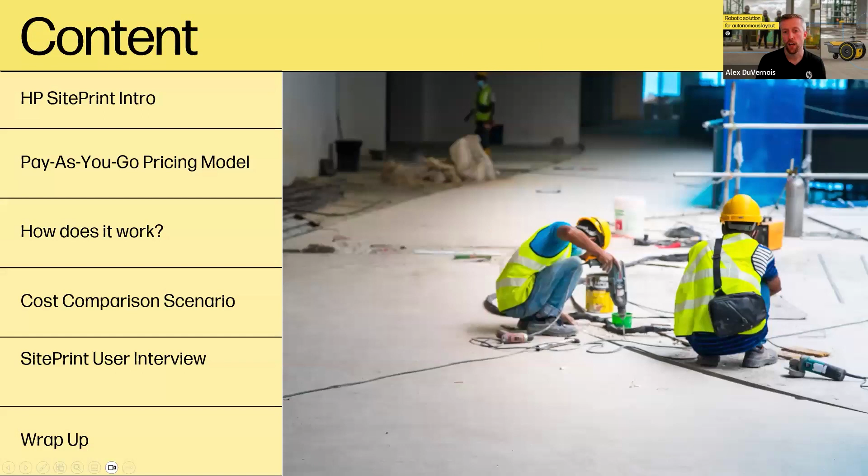So today during the call we're going to go over a few things. First, a brief intro into the HP SitePrint. Then we'll go over the pay-as-you-go pricing model, how it works, and a brief cost comparison scenario, before wrapping up with a SitePrint user interview and tying all the slides together as we finish up.

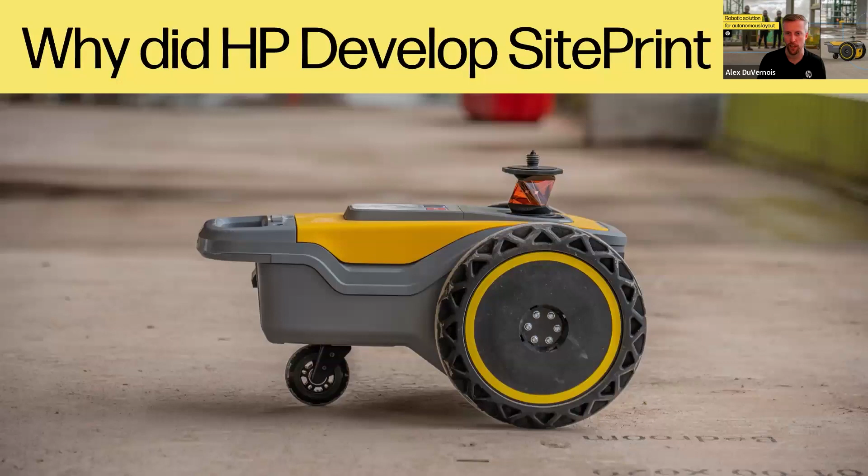So to get us all started, why did HP develop the SitePrint? When I think of HP, before joining the team here, construction wasn't necessarily one of the first things that came to mind. So why did HP decide to join this market? This is some informational graphics that a lot of you in the trades might find pretty repetitive—it's something we've definitely faced in the construction industry for a long time: productivity and labor shortage has really led to the construction industry as a whole lagging behind, especially compared to different industries such as manufacturing.

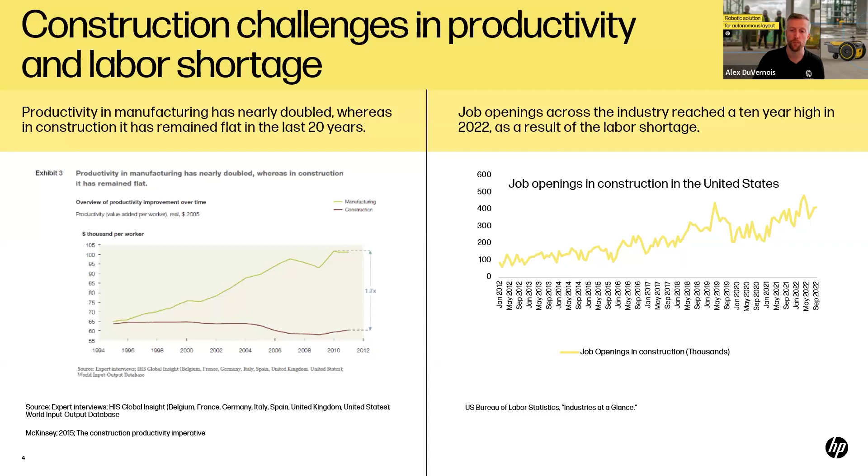On the right-hand side here, you're looking at all the job openings that have been up in the construction industry. You can see it's a steady trend up, and it's adding to difficulty within the trades overall—everybody's looking to complete these jobs on time and under budget. It's very hard to do when you don't have the manpower to finish those tasks accordingly.

One of the main issues we've come across is that layout can be a huge challenge to getting these projects done, not only on time but accurately and efficiently. The challenges we face today in the layout application process: first, it's a manual process—it requires human skill, a very skilled operator to understand and read those plans to make sure you're laying out and marking things in the right locations.

If you don't have that manpower and skilled labor able to complete that application, it leads to mistakes and reworks. Mistakes and rework can really be a killer on the bottom line of a job site. If you're having to build a wall twice or three times because it was put up in the wrong spot, that can really eat into profits overall and lead to delays and cost overruns.

So if we're all trying to get out of these projects profitably, accurately, and efficiently, it all starts with layout. Because if it's in the wrong spot, it doesn't matter how quickly it went up—it's going to cost just as much to tear it down and build it back up in the right spot.

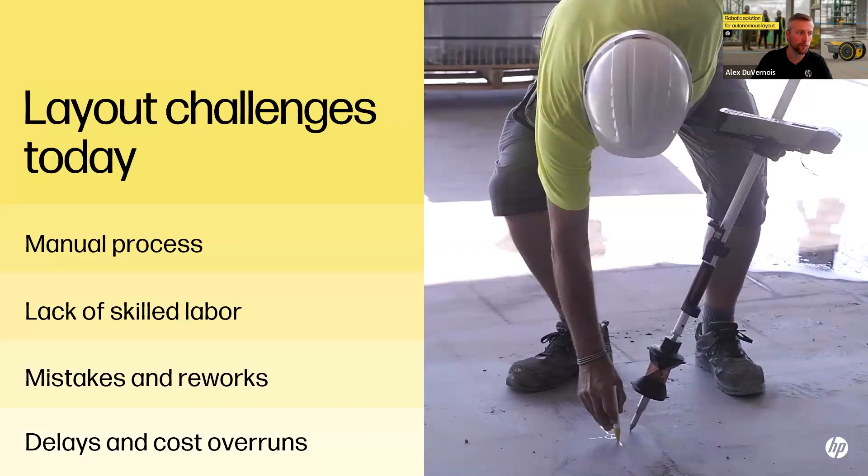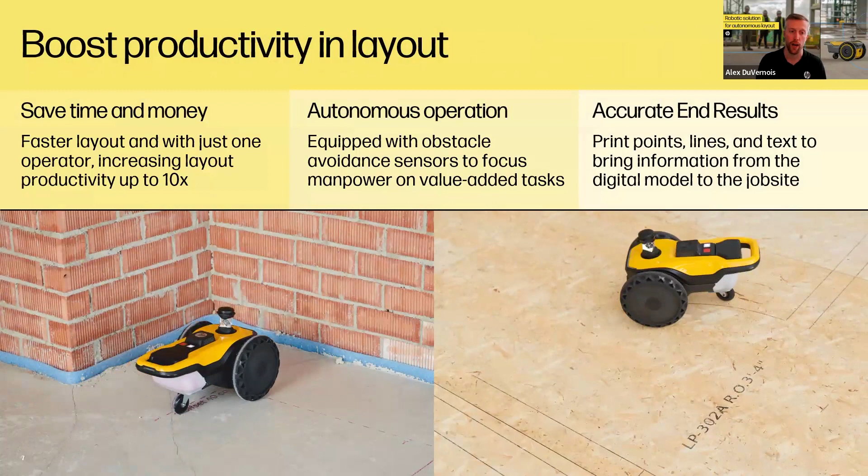So with that, say hello to the HP SitePrint. What you're seeing on the screen now is a short video of how the HP SitePrint operates. As the SitePrint rolls around the job site, it leaves behind the track lines of exactly what needs to be laid out on site. The way it operates is you position it with a robotic total station. Once the HP SitePrint understands where it is on the job site, it can print onto the slab, the floor, the plywood—all the applications you're looking to complete on your day-to-day tasks.

So what do you get out of it? You save time and money—it's a faster layout with just one operator, and it can increase productivity by up to 10x, depending on the size and complexity of the application. The other benefit is autonomous operation: once you set up the SitePrint and tell it to go, it does all that layout for you very autonomously. And lastly, you get an accurate end result.

So when I think HP, one of the first things I think of are printers.

When I think of the CAD files or drawing files that we plug into that SitePrint, as soon as I set up that robot in the right spot and hit print, whatever information I'm plugging in is exactly what I'm going to get out onto the floor. So it's about creating that digital twin, that last mile. That beautiful CAD model or Revit model you're working with in the field, what you want laid out and what is designed, is exactly that information you're going to get out there onto the job site itself.

Now that HP has developed this product, we know it works, we know it's meeting a need within the construction industry. How do we bring this to market? Obviously this is something that's going to have to make sense for the HP side, but also make sense for our customers that are implementing this solution onto their projects.

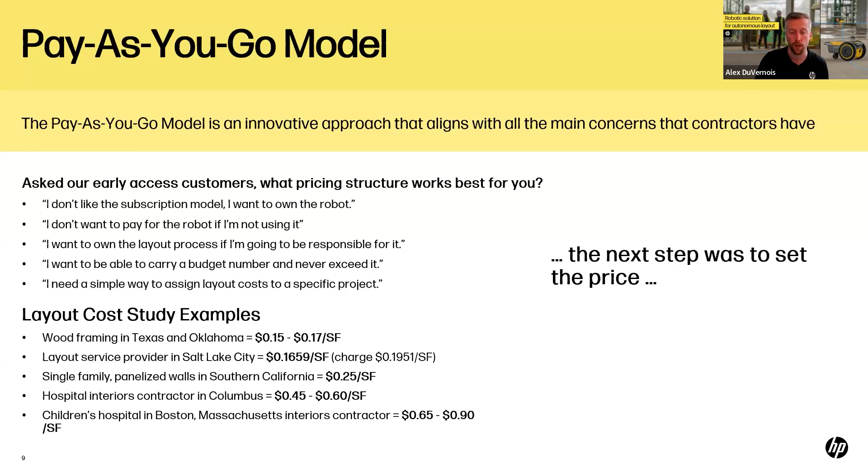So now that we have this data and this information, how do we institute this pay-as-you-go model? I want to be clear that the pay-as-you-go model is really a two-pronged approach, and you would need both approaches to really understand what this business model fully entails.

The first portion of this model is that the customer, or you guys out in the field, would be investing in the hardware itself. What does that mean? It means first and foremost, you buy that HP SitePrint and that is your robot. So you own it, it is in your tool crib. You can deploy it whenever you see fit or whenever it's really going to provide value to you on site. And at that price point of $50,000, it's a very attractive price point to get an autonomous layout robot into your tool crib portfolio.

So once you own that robot at $50,000, then that pay-as-you-go model kicks in. I have the robot, I bought this robot, but now I want to use it out on my sites. With that pay-as-you-go model, we have three distinct models to choose from.

The first is area, so that's 20 cents a square foot, points at $2 a point, and then lines, or $1 a linear foot. One of the first questions that comes up when I talk about the pay-as-you-go model is, well, what's included with that 20 cents a square foot? The answer is literally everything that you need to operate this robot. That includes ink, support, repairs, maintenance, and the software, both the user interface software and the cloud software, everything that you need in order to make sure that this robot is running efficiently for you.

With the linear foot model, it's very simple. It's very similar to how that square footage model works, but it's really based on the actual printed distance that the SitePrint travels. So instead of that 20 cents a square foot, it goes by every linear line, every single line that SitePrint is able to print, and that's how the CAD would be charged.

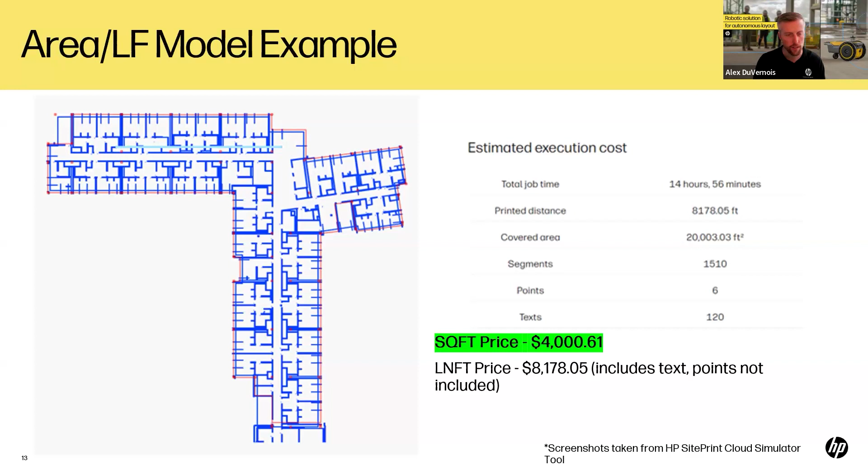in order to utilize the SitePrint on this specific project. So all things considered, the customer's buying that robot, has that hardware in their tool crib ready to go. And then for every project, they upload that CAD to get an estimate of not only how long is it going to take to print, but how much is that print going to cost them.

So it's something very similar for our points model. And our points model is something that's really utilized by our MEP contractors, that when they go out to sites, what they're really looking for are their specific hanger points or penetration points or something along those lines, where really all they need is an actual point location and a label.

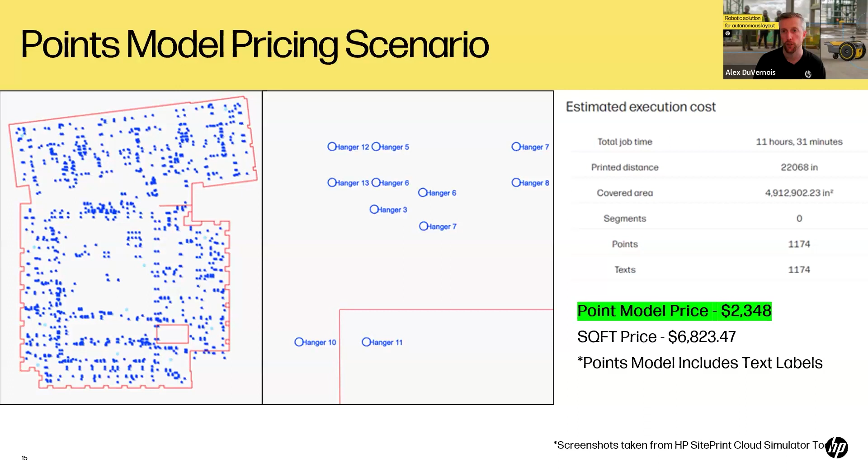to lay out. And as I mentioned earlier, everything really has to do with the CAD file. So we know that there's going to be adjustments and changes to the CAD in the field or as the project progresses. So what's really important is that as these new files or new versions come in, you upload those new versions, it's going to stay within that same project, and you're not going to get charged twice for that specific area or for that specific project that you're looking to print.

And when we're dealing with tape measures, string lines, plumb bobs, there's a lot of human error and rework that can come into that equation. It's very hard to really account for rework, but we all know it's something that is going to happen on site. With that, you're still at the mercy of scheduling delays and the lack of coordination in terms of not being able to get the right people onto that project at the times where you have that deck or that project in order to lay out.

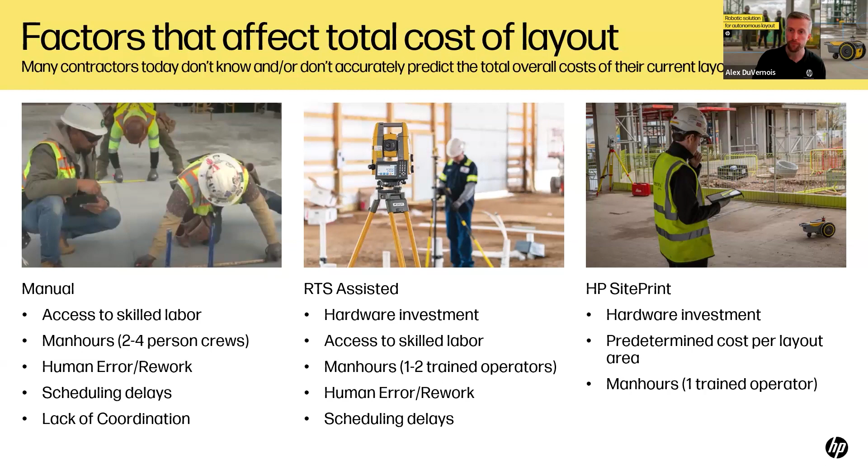So those are the basics of how that pay-as-you-go model works. But as we've developed over the last year of our rollout of this solution, we've added a few different wrinkles to what that pricing model could look like. So one of the main things that came up was, is there a maximum of how much I will pay per month in order to operate the SitePrint? And now the answer is yes. So the pay-as-you-go costs are capped each calendar month at $12,000 per SitePrint.

So what does this mean? Firstly, it rewards our high volume users with lower costs. So if you're printing 200,000 square feet in a given month, you're getting maxed out at $12,000 per month. So that effective cost of your layout, instead of that 20 cents a square foot, is now down to 6 cents a square foot. In addition, it limits that financial exposure for large applications.

So we work with some customers that lay out close to 1 million square feet in a given month. So if they're able to institute a few different SitePrints in order to get that layout done for them, there's not that risk of paying for every single one of those 1 million square feet that they're looking to lay out on site. And then lastly, we wanted to make sure this was applicable to any costing method. So this can be per square foot, per point, or per line.

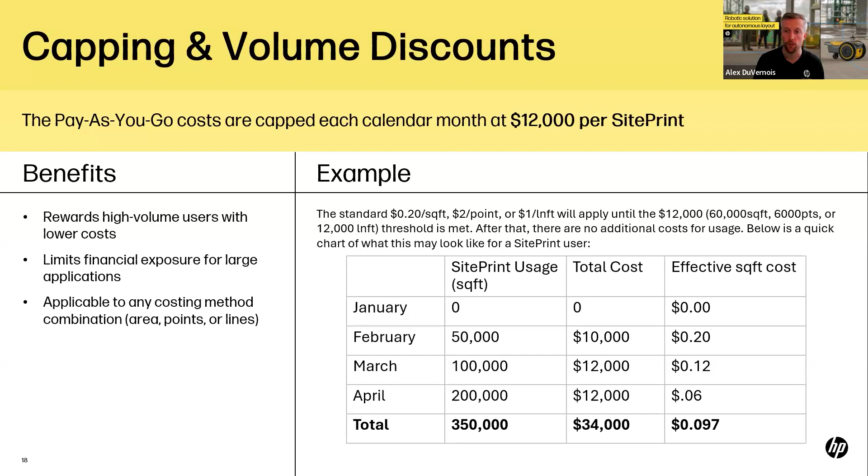So on the right-hand side, I did a quick example of what this looks like in practice, just using round numbers to understand what volumes look like in terms of what your total cost would be, but more importantly, what your effective cost per square foot laid out could look like with an HP SitePrint solution.

I want to get into what a quick cost comparison scenario will look like using some real customer data. So this was a scenario that we came across recently. It was a customer that had a 75,000 square foot hospital project to lay out. On the right, you can see this is the information that was uploaded into the HP SitePrint cloud. This project in particular was estimated to take about 45 hours and 35 minutes to complete. So when talking with the customer, trying to understand without the SitePrint solution, roughly how long would this take you to lay out? He told us it would take him roughly 2 weeks to lay out with a 3-man crew at a $75 an hour loaded labor rate.

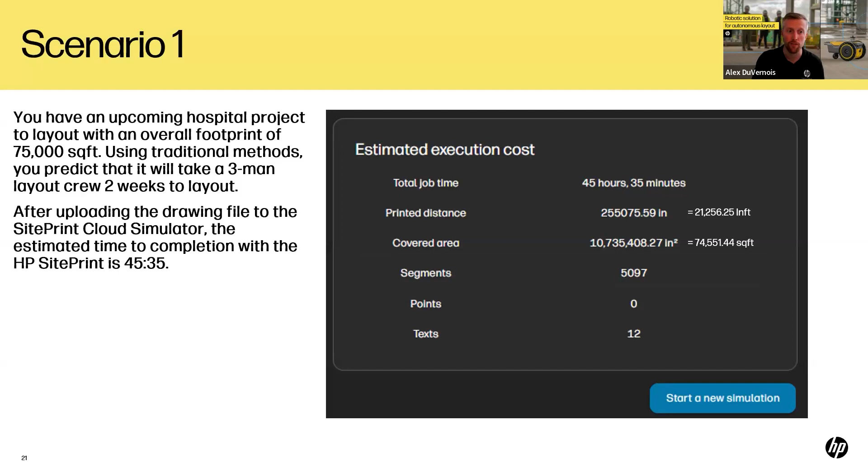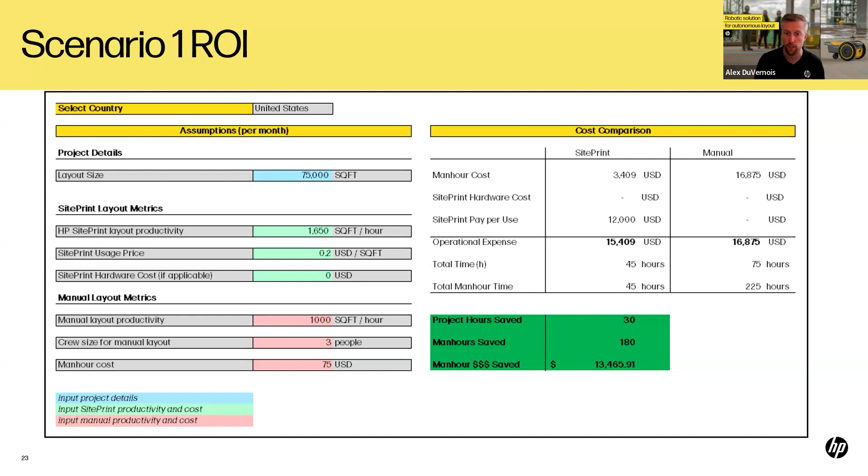And then my favorite part of this equation: he was able to do this in roughly 45 hours of man-hour time versus 225 hours of man-hour time with a 3-person operation. So this green box is really what it all comes down to, right? 30 project hours saved, 180 man-hours saved, and a total man-hour savings of a little over 13,000.

So given all this information, this is what that deep dive into the total cost of the project really looked like. The SitePrint cost was roughly 16 cents a square foot. The traditional method was a little over that, 20 cents a square foot at 22.5. So with that, operational cost is a debit to each side of that equation. But with SitePrint, we're able to really have that value-add of a little over $13,400 worth of man hours that would have been lost during that traditional layout method.

Because we all know with that labor shortage that is prevalent in most markets in the construction industry, those people that you had earmarked to lay out that project, it's not like they're going to be laid off or fired. They're going to be reallocated to different applications on that project to help you finish that job a little bit quicker, or they can go to a different job to get another one off the ground.

So all things considered, the SitePrint cost versus the traditional layout cost came out to about $1,500 savings just on this project alone. And what this really doesn't take into account is the value added from some of these hidden costs as well. So the elimination of human error, right?

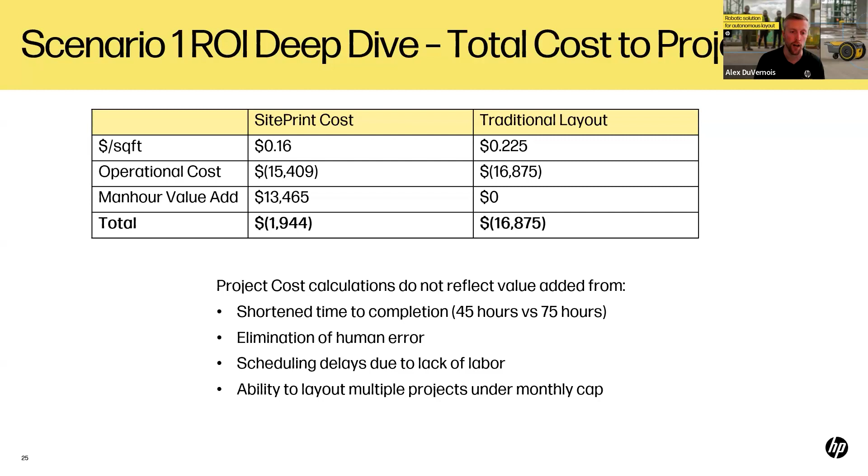The scheduling delays due to lack of labor. If you only have to dedicate one person to this versus three, and the ability to lay out multiple projects under that monthly cap. So in this scenario, this was one project that took roughly a week and change to lay out with the SitePrint, but now there's almost 3 weeks of usage that can now be implemented on different projects across this specific customer's workflow chain.

But with that, you don't have to take my word for it. So we had a discussion, a pre-recorded discussion with Chris McKee from Turner Construction out of their Ohio branch. And with that, I am going to share my screen with Chris, and you'll be able to hear it from him firsthand, just how the HP SitePrint affected his business and work.

My name is Chris McKee. I'm the reality capture manager in this area. Basically, we survey everything. We're surveyors. We're just surveyors on steroids. We have a very good tool set that we use.

I've been surveying for about 30 years. I'm going to be sitting for my professional surveying license this year, hopefully, if the state board lets me. And we use everything from total stations to GNSS to scanners to robots, levels, and everything in between. So we use every tool in the tool shed when it comes to what we do, and we make sure that we're as accurate as possible, because we survey. We don't do vertical construction. We survey everything. So yeah, that's what we do.

Awesome, well, that's fantastic. And again, we appreciate you joining us today. So prior to the HP SitePrint, can you walk me through what did Turner Ohio's current or layout workflow look like?

Yeah, so currently we have a group called SPO, which is a self-perform organization within Turner. And we hire people, union members, and we also team up with other companies to lay out walls and just all kinds of things. Turner wanted to try to bring this in-house and see what we could do in-house, and we have people that are specialized in this, and a group of people to do that.

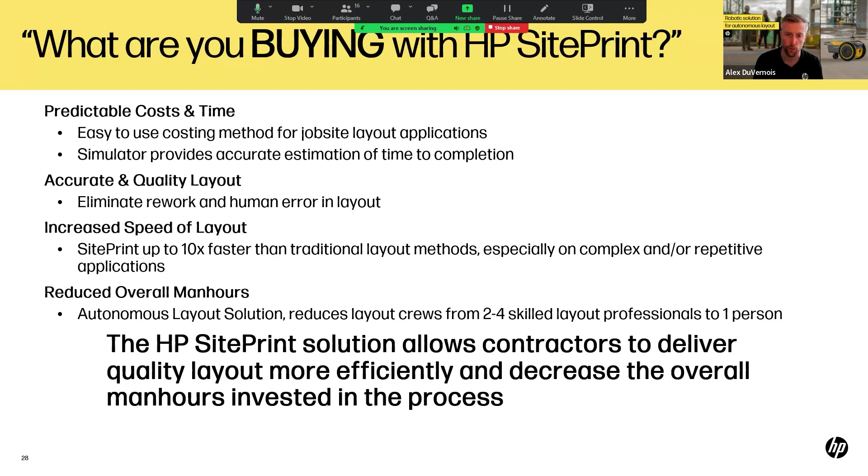So firstly, the big thing I like to understand is what are you buying with the HP SitePrint? If we break it down into 4 key bullet points, what you're buying is predictable costs and time, accurate quality layout, increased speed of layout, and reduced overall man hours for your projects. So really what it comes down to is one word: time.

So what you're buying with the HP SitePrint is you're able to buy time on each of your projects within that layout process, but it also has effects downstream by reducing rework and increasing efficiencies on site. The success of each project comes down to one thing, and that's hours. So if you're able to save 30, 40, 200 hours on a given project, what does that do for your overall costs and for the overall bottom line for your company?